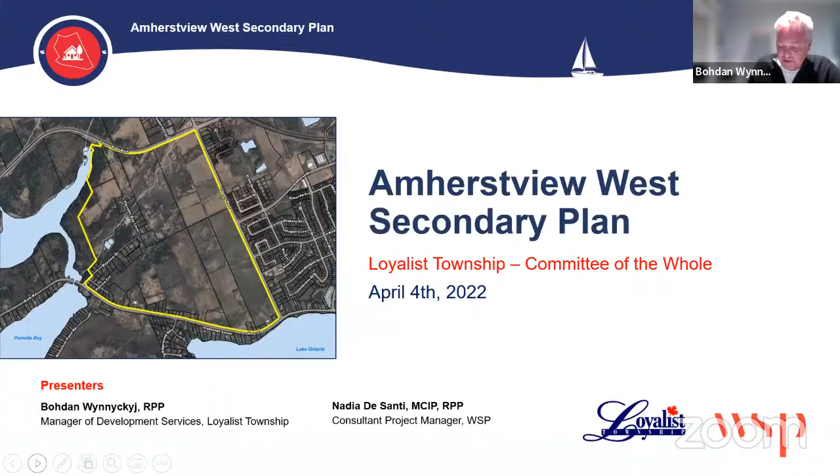So the key objective here today is to obtain your feedback on the three land use concepts, or alternative land use concepts, and then feed this into the analysis we're undergoing in the next couple of weeks, so that we can come up with a recommended land use option. Let me stress, at this point, the project team has not determined which one of the three options it prefers.

So on the screen right now is today's agenda. We are, of course, on item one, which is introductions and background information. What will follow is a presentation by Nadia, which includes an overview of where we are in the development of the secondary plan, an overview of the various background studies done or in progress, and then a quick review of the three actual land use concepts under consideration.

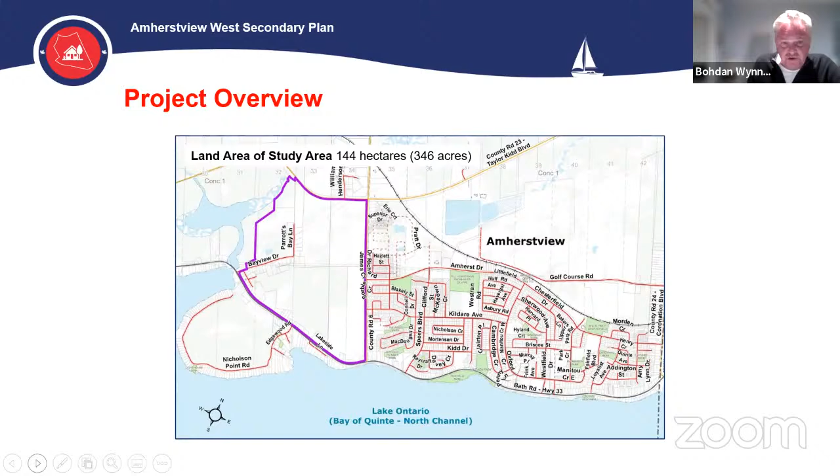Well, let's begin with a brief recap of the lands that are subject to the secondary plan. Amherstview West is approximately 144 hectares in size, or 346 acres. It's bounded by Taylor Kidd Boulevard, or County Road 23 to the north, Bath Road, Highway 33 to the south, Parrott's Bay Conservation Area to the west, and County Road 6 and the existing built-up area in Amherstview to the east. There are some existing residential properties currently within this planning area.

These are the declared and council endorsed objectives for the secondary plan project. One is to identify the future needs and priorities for the community of Amherstview West to the year 2046, including housing types, urban design, community amenities, protection of the natural environment, stormwater and servicing, transportation, and that includes active transportation as well. To prepare a land use plan implementing the policies of the official plan, the secondary plan will be implemented through an official plan amendment as well as a zoning bylaw amendment. We also will be preparing urban design guidelines to guide the built form of the area to ensure compatibility in a new and developing community.

Parallel to this, we have been laying the groundwork for satisfying a municipal class environmental assessment process. The MCEA will be integrated with the secondary plan to address land use, servicing, transportation, and environmental considerations. But the key milestone we are at right now is the release of these three land use concepts that we feel could satisfy the objectives of the project. We want to hear your feedback on these three alternatives, feed this into the analysis, so in the coming weeks we can come up with a recommended land use option.

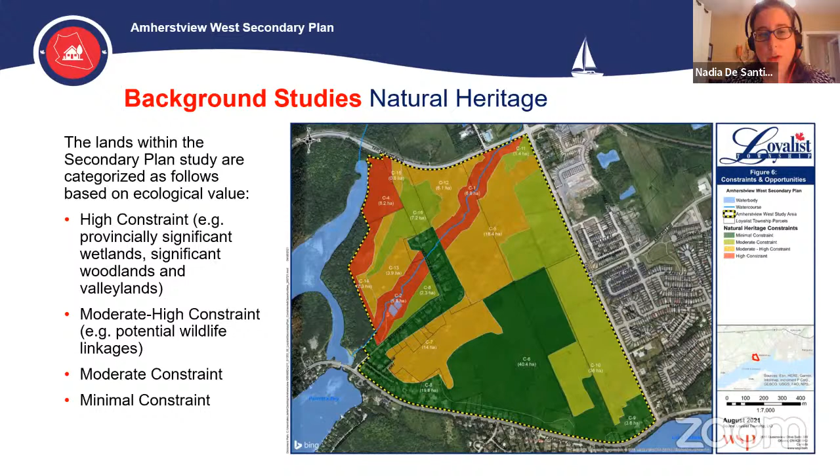We have undertaken a more detailed cultural heritage inventory report for property B at 4661 Bath Road. Our colleagues and the township have met with the owners of the property and had ongoing discussions; they were quite participatory and willing to communicate and discuss further. These areas have also been shown as a cultural heritage potential on the land use options.

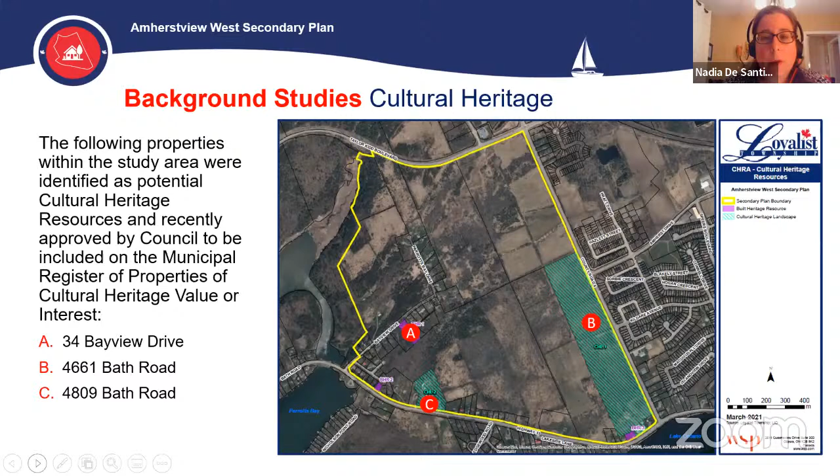Next slide, please. In terms of the guiding objectives, just recognizing that Amherstview West is in a settlement area in the township's official plan. Settlement areas are areas under the 2020 provincial policy statement where future growth and development should occur, and in this particular area, we're looking at urban development moving westerly from the existing community of Amherstview.

We are looking at land uses for residential and commercial. We want to make sure that they are planned in an orderly fashion and in an efficient manner, looking at strengthening Amherstview's commercial base and opportunities for new amenities and economic development in Amherstview West. Next slide.

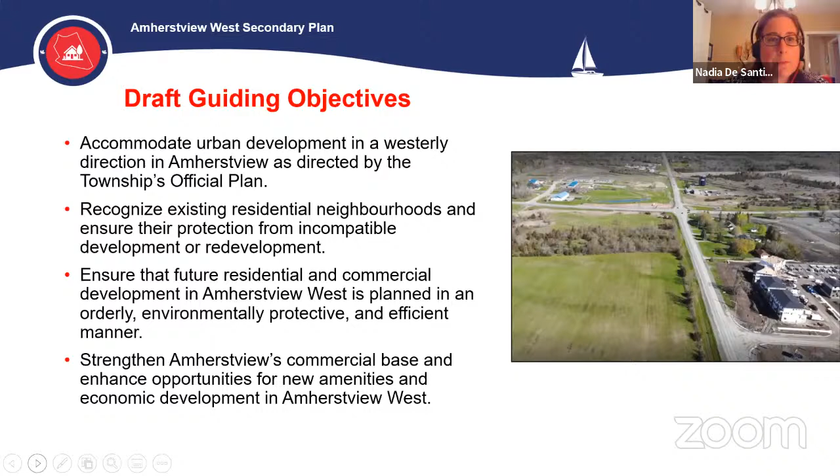We want to ensure that we're respecting the existing character of Amherstview West and the preservation and protection of provincially significant natural features and other important natural features and cultural heritage resources. From a transportation perspective, we want to make sure this area is well connected to the rest of Amherstview and the township, and our plans will look at both a road network and an active transportation network.

As Bohdan mentioned, we will have a separate urban design standards document to help visualize and describe items such as built form, open space, site sustainability, and climate change resiliency, which will guide future development in the secondary plan area. The secondary plan will be implemented through the official plan amendment and zoning bylaw amendment, but also provide direction for future plans of subdivision and future site plans.

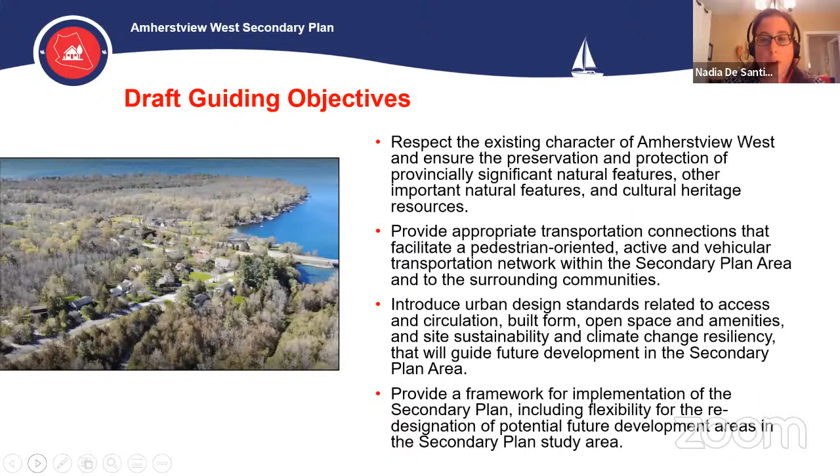It will include a phasing schedule and triggers for moving on to the next phase, as well as flexibility for the redesignation of potential future development areas, which I will highlight in the land use options.

Next slide, please. So based on a number of items, these are the assumptions we used. Further to the Hemson study done for the township's official plan, we were in correspondence with them to help extrapolate the projections for this specific area, and so we're assuming a 25-year planning horizon, to 2046.

With a population growth anticipated of approximately 2,420 people, that translates into approximately 1,000 residential units, which translates into a land area of 20.47 net hectares. From an employment perspective, we've considered a minimum of 1.3 net hectares of commercial employment land, not industrial type land uses. Those will continue to be directed to the business park, which is north of the study area.

These commercial employment land uses are retail, cafes, personal service type businesses, law offices, those sorts of things. There was a strong community desire from the visioning session last summer that really was supportive of having these types of employment and commercial uses in this area, so we've accounted for that.

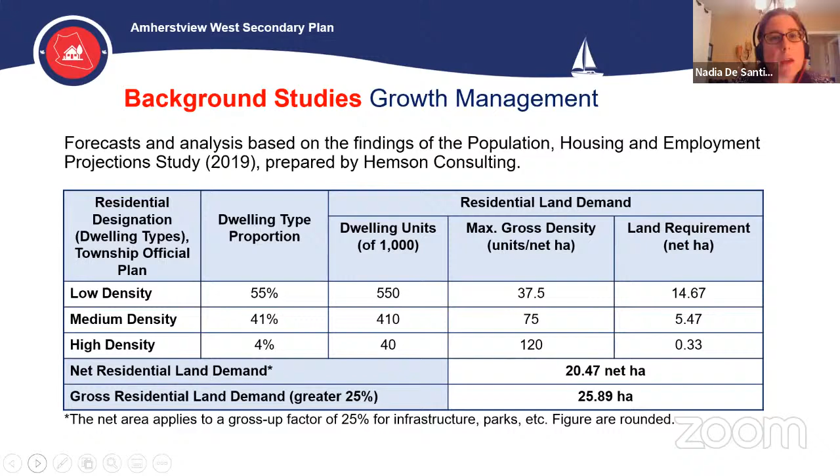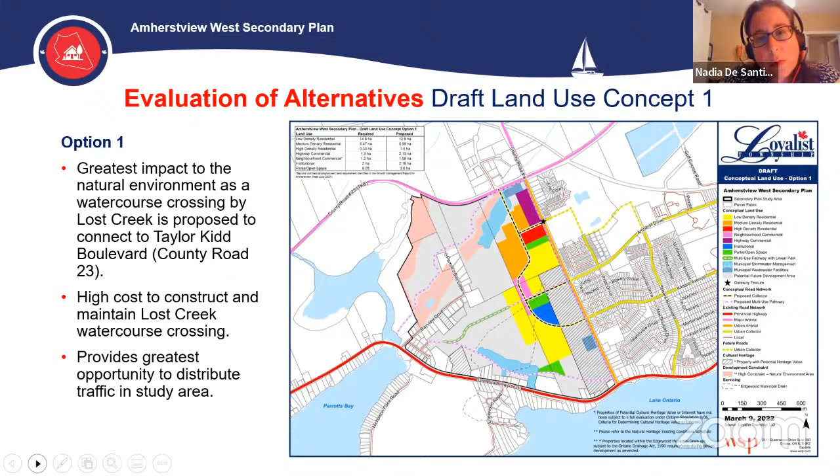This one has a slight difference in that the collector road does not connect to County Road 23 to the north, connecting instead a bit more centrally, but still through Amherst Drive. That intersection, we're also showing on all 3 concepts with a black star as a gateway. So this is the new community of Amherstview West, and this is the gateway, that entrance into the new community.

And so shifting some of the land uses a bit further south in a different arrangement, again showing the commercial block off of County Road 6. Again, from a visibility and access standpoint, retailers and commercial uses like that visibility, obviously, for their customers and access, so we're shifting that around.

And then the next option, also just a different arrangement. I also want to identify that all 3 options show some pedestrian trails conceptually, and those have been taken from the township's official plan schedule as well. So we've shown that, again, they're conceptual in nature, no alignment has been confirmed. And I think that's all I want to say on this one.

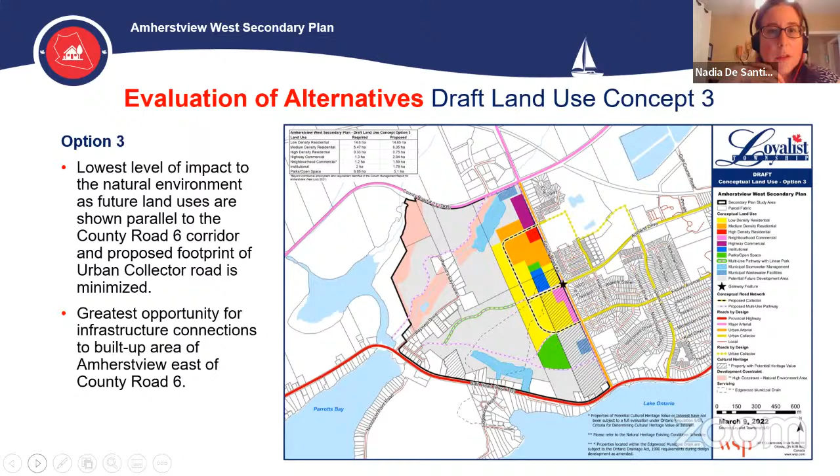So the next slide, please. In terms of phasing, we're proposing 3 phases. Again, this is part of the discussion we'd like to have with council and continue to have with the township and the community. The first phase being 0 to 10 years of approximately 490 dwelling units, including expansion of Amherst Drive to the west, improvements to County Road 6 and the Amherst Drive intersection, development along the County Road 6 corridor, and implementation of the stormwater management facilities. The next phase, approximately 11 to 15 years with another 220 dwelling units, continuing the expansion of the road network to the south and the trails and stormwater management facilities. Phase 3 is 16 to 20 plus years with the remaining 260 dwelling units.

What I would like to say on this is that the secondary plan will have policies and a phasing schedule, and there will be triggers that will help guide when we go into the next phase. The phasing is very much tied to servicing. As you know, the township is updating and working on their infrastructure master plan, which will include the whole area. But there's no sort of check mark that says, oh, it's 10 years, now we go to the next phase.

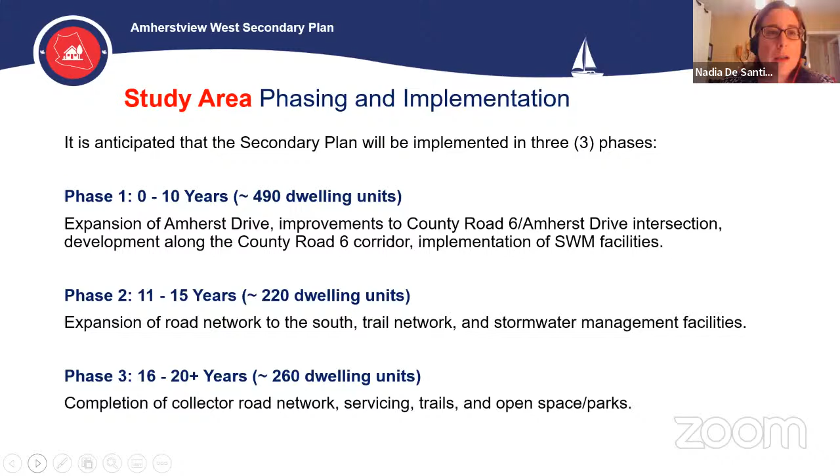So I know that we have 30 minutes, so I guess we can open the floor back to your worship and the council. If there are any questions, any items or comments that anyone wants to raise, we're happy to answer them. Thank you. Thank you, Ms. De Santi.

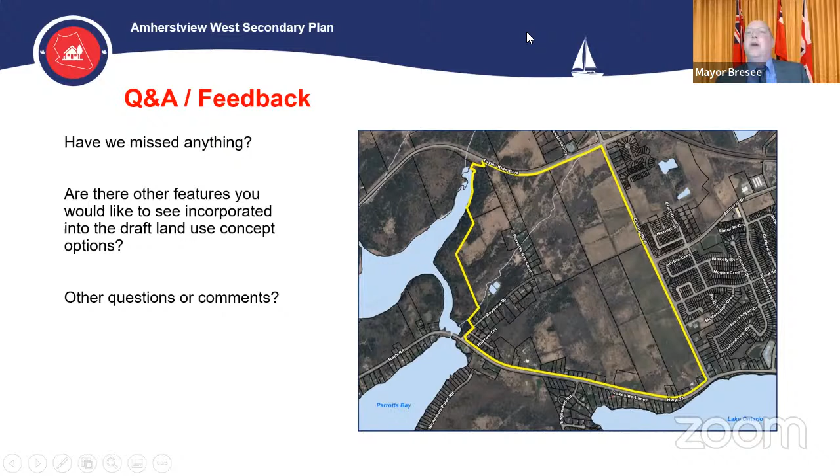Okay. I know that this has generated a lot of conversation in a number of places, so I'm assuming it will generate some conversation here as well. Who would like to start? Comments or questions with regard to the materials presented? Okay. Councillor Gordon, go ahead.

Sorry, just on the one proposal there with regards to, I guess initially you're proposing a road that would join not County Road 6, but Taylor Kidd, I call it. But then you take that away, and with that many units in there, is there concern for too much traffic bottled up inside? We get a lot of flack in Amherst now for when we opened the road up. We were always going to do it, but it wasn't really proposed to a lot of the people that bought their homes. But when Kildare came onto County Road 6, it certainly caused a lot more traffic. However, that sometimes is necessary. So I'm just wondering, heading over to Taylor Kidd, in my opinion, would probably almost be necessary with that many more people. And if we have the growth that we have now, everybody leaving all at once to go into work, and that same thing coming back. So just a thought on that particular road there.

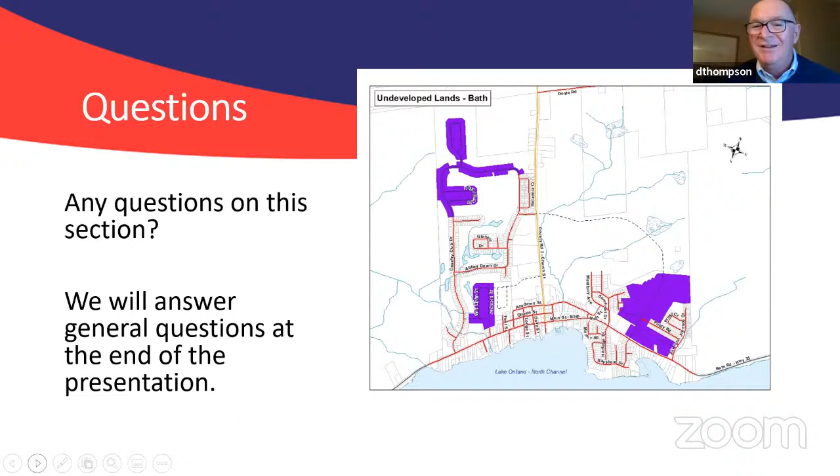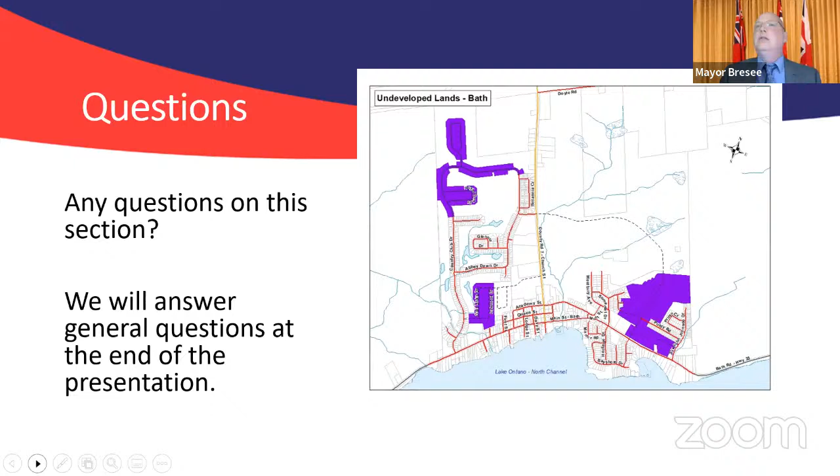Any questions, anybody? Not seeing any - I think we understand the process. Okay, it parallels a lot to what the Planning Act requires on the secondary plan, so it makes for an easier discussion.

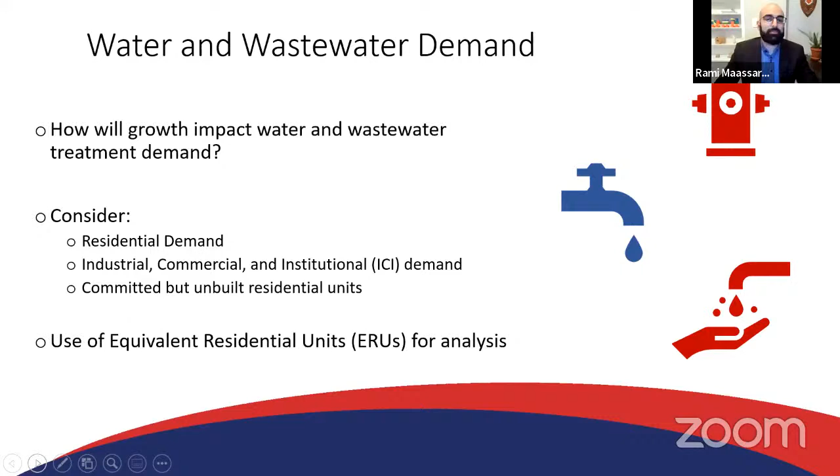So with that in mind, next slide please, MJ.

We use the revised high growth scenarios to calculate residential and ICI demand over the study period. So we have our best guess as to what's going to happen for residential growth and subsequent demand. For ICI growth, we assume it goes up at the same rate as residential growth. Again, best guess, anything can happen, but this seems like a conservative way of moving forward.

After that we look at historical data to figure out how much water an actual average residential unit uses. For water, we look at the 3-year maximum daily flow that occurred over the last 3-year period, so what was the highest one-day demand for water. Whereas for wastewater, we look at the average daily flow demand over 3 years.

The reasoning there is that a water plant has to be able to produce the maximum possible demand. So if we think back to Vancouver 2010 Olympics during the gold medal hockey game, where everyone decided to flush their tanks at the same time, water demand spikes instantaneously. You've got to be able to provide water for that. Whereas a wastewater plant can absorb high flows, so that's where the average comes in.

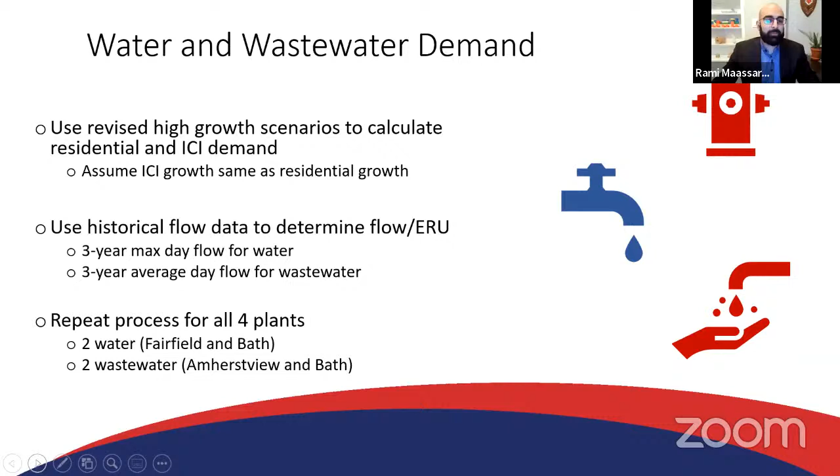Now we repeat this process for all 4 of the plants in the township: 2 water plants, Fairfield and Bath, and 2 wastewater plants, Amherstview and Bath sewage plant as well. So next slide please, MJ.

So for the Fairfield water plant, which services both Amherstview and Odessa, currently the rated capacity is 8,000 cubic meters per day, and it has 4,085 ERU connections to the system. Just one more click forward, MJ, please.

Thank you. So the maximum daily flow was observed in 2020. It was 1.06 cubic meters per day per ERU. That's the factor we use: if we currently have 4,085 ERUs and multiply it by 1.06, then the 2021 demand feasibly should be slightly more than 4,085.

Rami, if I could just for a second, I note in that calculation you've got 4,085 ERUs, with 4,000 of them residential and 600 of them ICI. Wouldn't that add up to 4,685? Yeah, I think so, so there's a slight typo there. Okay, so I just wanted to make sure I understood the math. Yeah, I believe the number in your report should be accurate, so I do apologize for that. If it's not, we'll be sure to correct it, but it's in that ballpark.

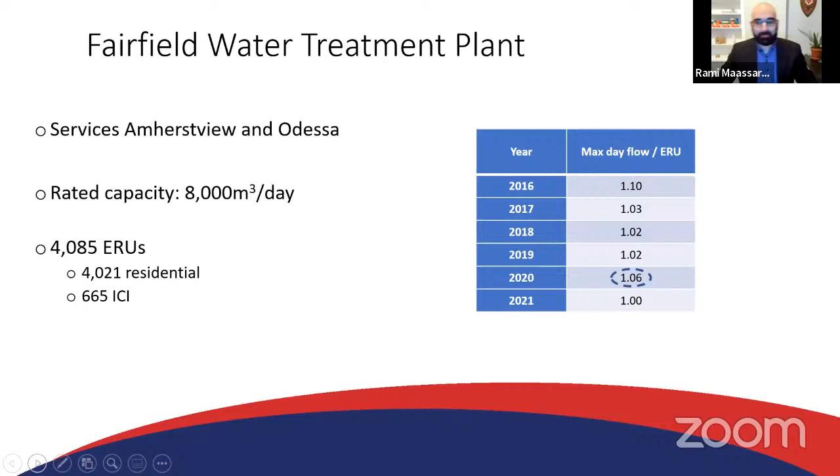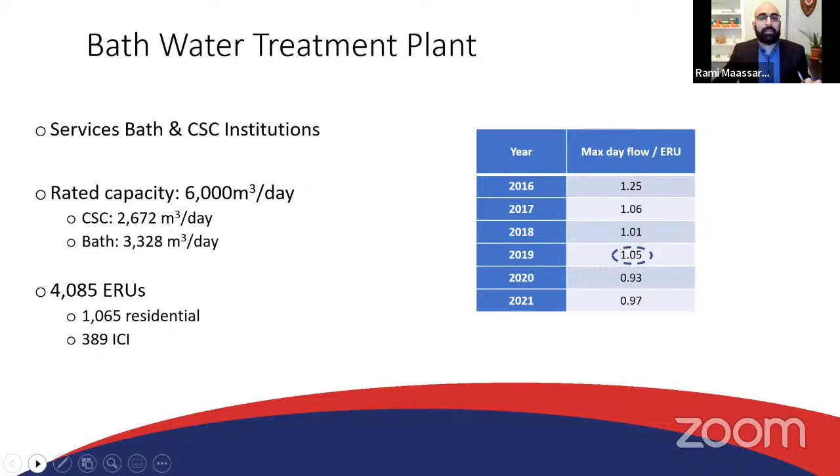Do we want to take a question here, or move on to sewage? No, keep going. Almost there, I promise.

Again, we're not projecting that the capacity of the plant will be exceeded over the study period, and we should be around 80% in 2032. You'll notice the trending on those blue dots, the actual flows observed, is going down even though the population is going up. A couple reasons: reducing leaks into the system is one, and drier years is another. The sewage collection system is subject to precipitation, which is something we're working on as part of this project, trying to develop an inflow and infiltration program to reduce the amount of leaks going into the system, so we can try to increase capacity without increasing the plant or doing much work on it.

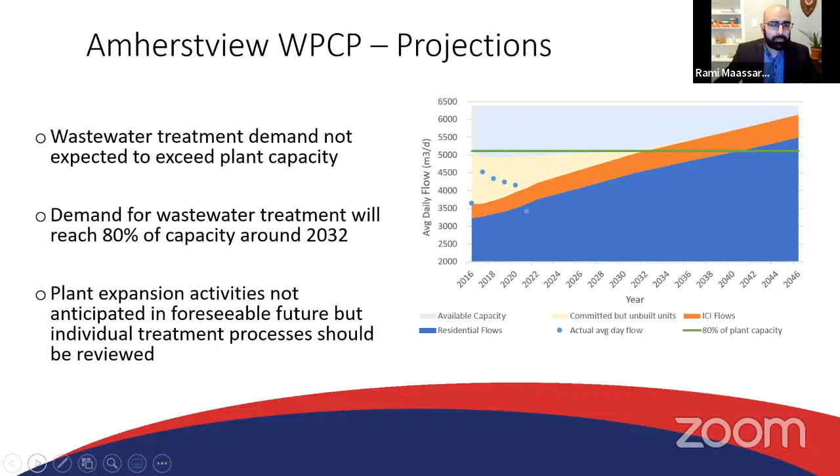Again, we're not projecting that the capacity of the plant will be exceeded in 2046. If anything, we're maybe going to hit 80% by the end of the study period. Same caveat here, the plant as a whole is probably fine, but we want to make sure every single part of the system is fine as well. Sorry, my dog is getting a drink of water, which might be distracting to the audience, I apologize for that. But we can move on to the next slide.

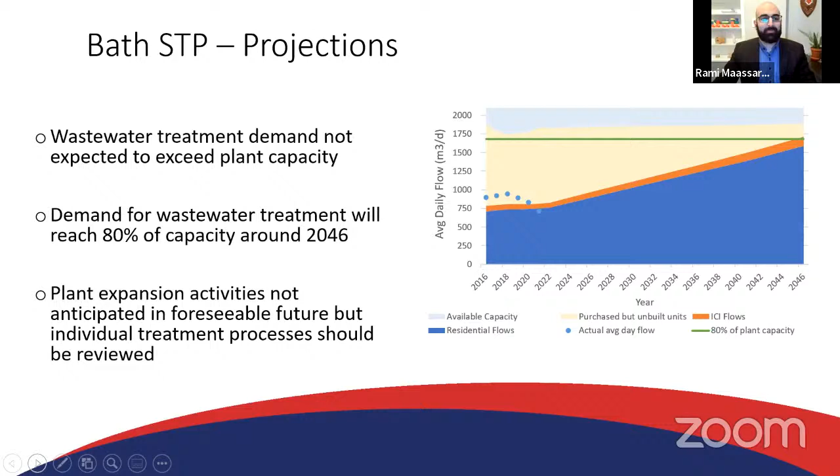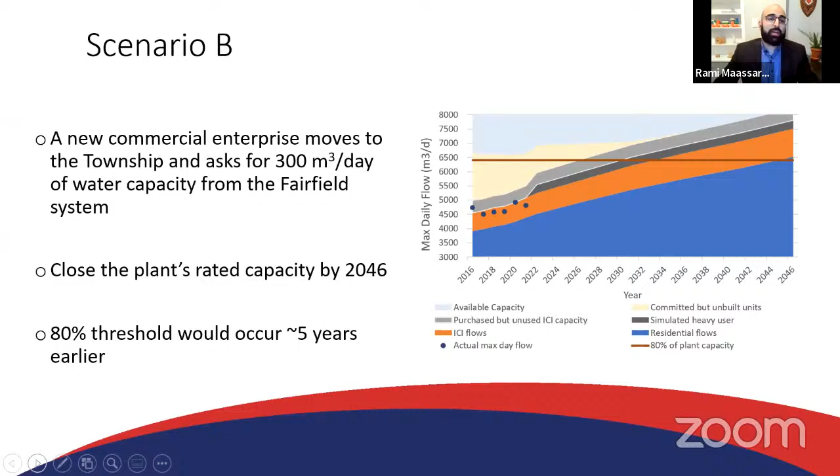But where it becomes interesting is what happens if both of these things happen at the same time—scenario A plus B. Individually, not a huge deal, but if you combine them: if council were to allocate 1,000 units tomorrow, and then the next day a heavy ICI user were to arrive and request 300 cubic meters of water per day, then all of a sudden any available capacity is gone right then and there. Beyond that, there would be nothing left to allocate, which could have significant impacts on growth within the township moving forward.

This could be managed through plant expansion activities, but it takes time to go through the design process, the permitting process, and the approval process to expand the plant. So it's not something that can be done quickly. These are just some things to keep in mind when making decisions on how to allocate capacity in the near term and the long term.

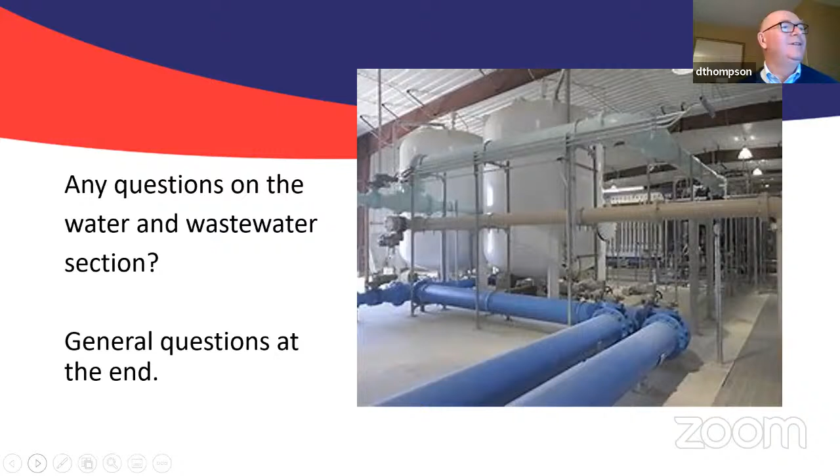So next slide, MJ. I'm going to talk about problems and opportunities. Next slide.

I'm just going to focus on a few examples of how we're using the themes and what differentiates an IMP project from a life cycle project, et cetera. Jenna kind of alluded to this a second ago, but one practical aspect is that projects identified with a growth component can be partially funded by DC or impost fee revenue.

So it's important to identify those, get that money rolling and that sort of thing. And I'm just going to go off script here a little bit.

And I know the mayor has identified an aggressive growth thing, and time will tell where that number is. But I'm familiar with a number where 1 cubic meter of sewage treatment or potable water treatment 10-15 years ago was in the range of $2,000 to $3,000 a cubic meter sort of thing. So one represents one house.

So that means if you overshoot in your building by a sizable amount, that means there's an investment sitting out there with no way to fund it, or it's difficult to fund it, put it that way. So the importance of monitoring the growth rates, as Jenna mentioned and Rami mentioned, is very important, because it gives you that early warning system. And it's more important to have all your ducks in order, ready to go when you are ready, but not to get too large.

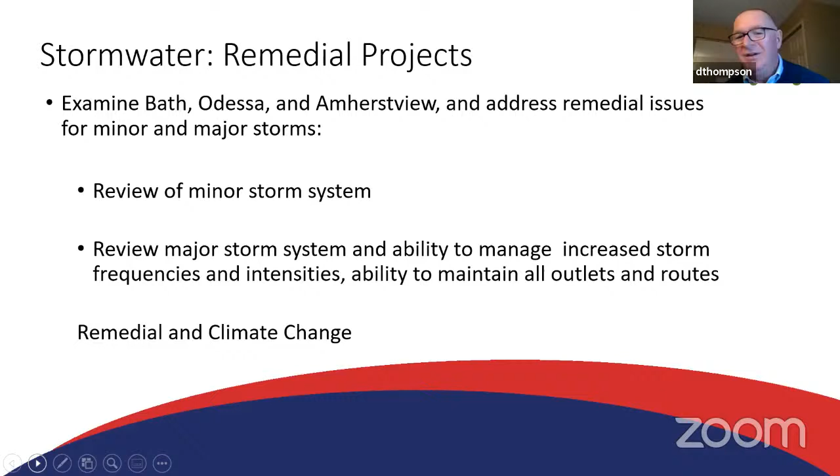Our main time is being spent on reviewing the minor storm. Is our existing system working, causing us any grief? And are we able to handle the big storm with our major systems? Do we have the outlets to let that big storm get out and drain properly? So a couple things have been identified through that process.

We talked about, Randy's talked about the water and growth projects for water and wastewater. We're also looking at all the other components, the wastewater, the storage systems, the piping, truck water services. Not just for Amherstview, but for every community.

We're also looking at what will help our infrastructure. Rami mentioned the I&I. On the sewer side, the other issue is our non-revenue water. There continues to be a big fraction of water that we produce at the water plant that we don't get any revenue for. That number is down, but it's still measurable. So any improvements on that percentage is money we don't have to spend on new capacity.

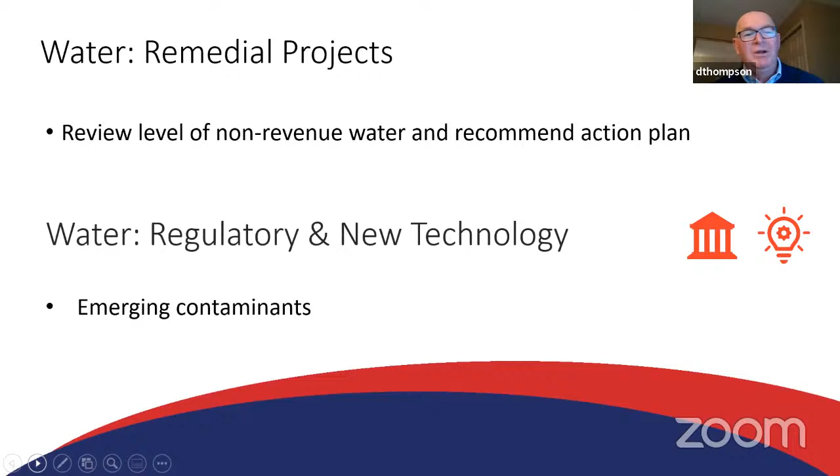Regulatory and new technology - the regulatory side has been relatively quiet, but with climate change, the water chemistry in the lake is changing. There's discussion on pharmaceuticals and that sort of thing in the water that keeps us on our toes, so we're looking at those issues too. Next slide.

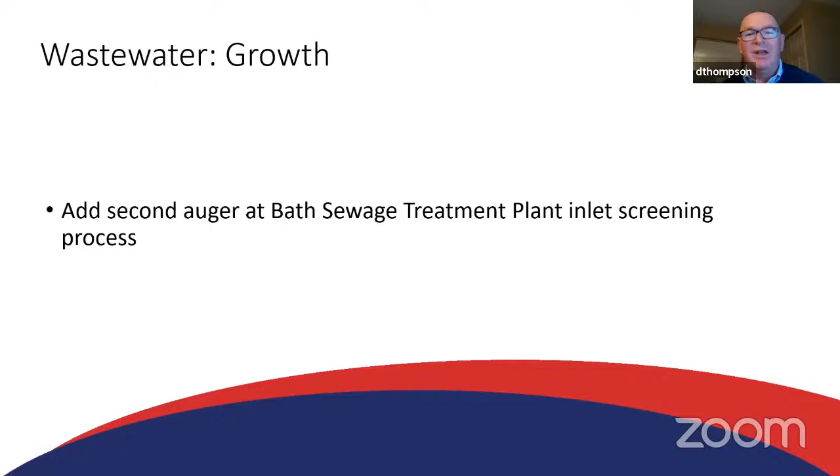The Bath sewage plant has some operational issues. Even though the growth side is good, as Rami said, we have to look at all the separate processes within that system, and to tell you the truth, each component has some issues there. So that's a major project that's probably going to surface as we get our recommendations together. Next slide.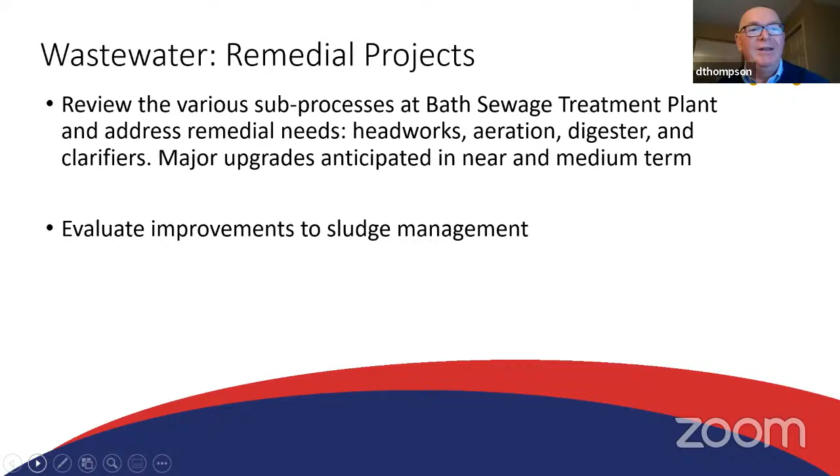Next slide. One of the things that's come through is modular membranes for sewage treatment, and there may be an opportunity to apply that at the Amherst facility to give us some incremental expansion without doing big civil heavy duty tankage and that sort of thing. So that's something we're looking at.

I do this for a living these days, so if you want to start with me, I'll feed it out to the rest of them as I need - sort of thing. So that's the end. Council questions.

Unfortunately, we also lost Councillor Parks along the route. We are down to just the four of us. We do still have quorum, so we're fine that way. But council, do we have questions with regard to this report at this time?